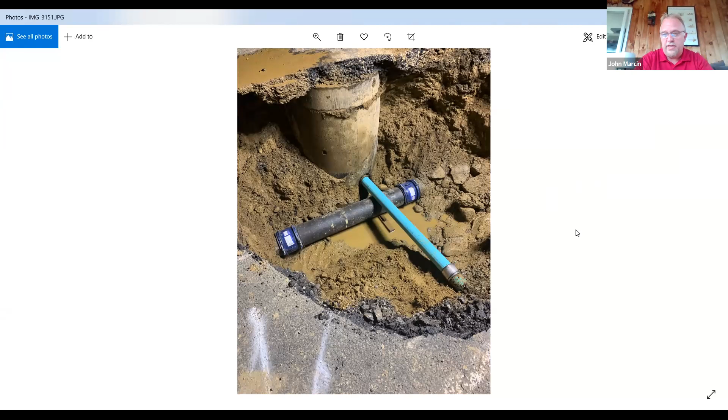I'm going to share a different picture now, and we can see. So the repair itself ended up being pretty tricky. Can you all see that picture? Yes, okay. So what you're looking at the top of the screen is a gravity manhole.

This was flow going from the left to the right, down the hill to the pump station. The black pipe on the very bottom is the 12-inch force main that's pumping up the hill, and this is after the repairs we made. The green pipe going into the manhole is the lateral coming from the high school. What we discovered when we eventually excavated everything was there was a patch placed on the original 12-inch force main right here, likely when this lateral was installed, which had ultimately failed and caused a leak in this part of the force main.

We were able to cut out about 8 feet of that 12-inch force main, install a new piece of pipe, install the 2 couplings, replace the lateral, and backfill everything. The team got that done. We started the dig at 4:30, and the road was paved and ready to go at 5 a.m. the next morning. So it was, like I said, a good team effort. AJ Penna contractors did an outstanding job.

It was a good effort in communication with DPW and the mayor's office and Ralph's team to make sure we got all the proper notifications out and to prevent any problems.

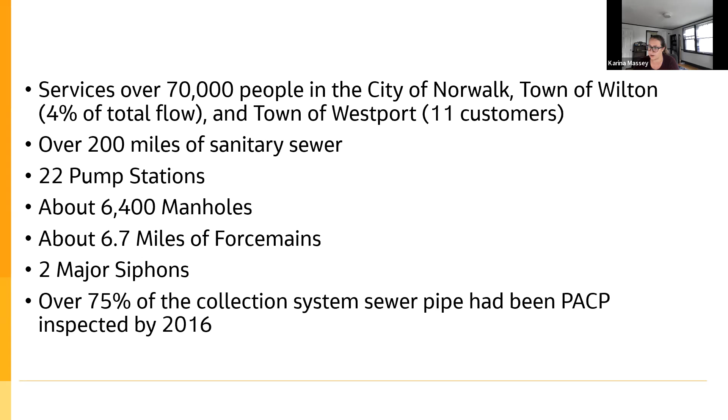When we began this project in 2016, over 75% of the collection system was PACP coded. That's CCTV inspections, but with the PACP coding, which makes reviewing videos and getting their likelihoods of failure easier. Now that number is a lot higher, but that's where we started in 2016.

So basically, when we start looking at projects in the collection system, these bubbles are kind of what my brain feels like trying to figure out what the problems are, because there's a lot of issues that go on in a collection system. Do you have fog issues, debris, deformed sewers? How are your force mains, broken sewers, historical problem areas? You have all this information coming at you, and it's really hard to decipher what is the focus area for each collection system, since each municipality is different.

From having a lot of meetings with Ralph and the team, and having, at the time, Jacobs was the operator of the plant, so we had some personnel who knew the system intimately, we were able to break down what we were going to focus on.

So we focused on the broken and deformed sewers using that PACP coding, likelihood of failures, and then we made consequence of failure matrices, historical areas, or as you guys call them, hot spots. And then we looked at the force mains and pipes downstream of the force mains to be included into the project.

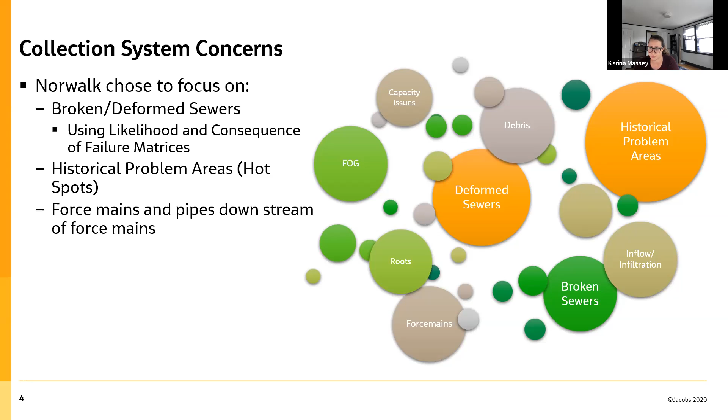So as you can see, we kind of got our bubbles down, and we ended up with a $2.75 million sanitary sewer rehab project. It targeted 36 pipes, which were part of our likelihood of failure and consequence of failure matrices.

And then out of the list of 79 hotspots at the time, we flagged 43 of them for sewer rehab. 13 were put on a watch list, 12 remained on the hotspot list, and then we noticed that 11 of the locations could be removed.

And then for force mains, as Ralph had said earlier tonight, they did a lot of CCTV of the pipes downstream of force mains to make sure they didn't have H2S deterioration or other issues. And then we also put the Marvin Beach force main replacement, which was designed under this project.

But as some of you might remember, there was a major failure before this project was able to get into construction. But having those documents already like 90% designed, they were able to quickly jump on the force main replacement under emergency conditions. So it helped speed the replacement of that force main.

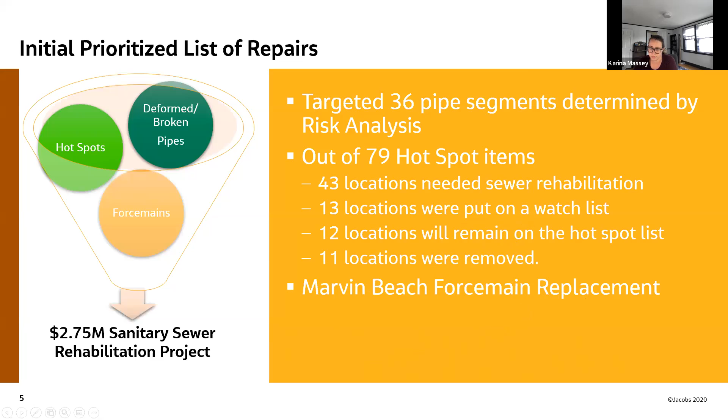So now we're in the construction phase. This is a short liner being impregnated.

So what got included in our construction project? We had cured in place pipe lining, pipe replacement, cementous and epoxy manhole lining, and then short cured in place pipe lining. So you can see on the left, we have the dig repairs, and on the right, you see them inserting a liner.

So something unique about this project is we decided to include additional pipes for repair mid-construction. We had a good project team together with the contractor, Jacobs, and WPCA. And we knew coming into this project that we weren't able to get all of the pipes that we thought were at risk of failing. We just did the ones that were the best, the biggest...

What do you call it? The biggest bang for your buck, kind of what you could get repaired - you get the ones that are higher consequences off the list. So those were in the original bid package, but then we added more pipes based on a likelihood of failure.

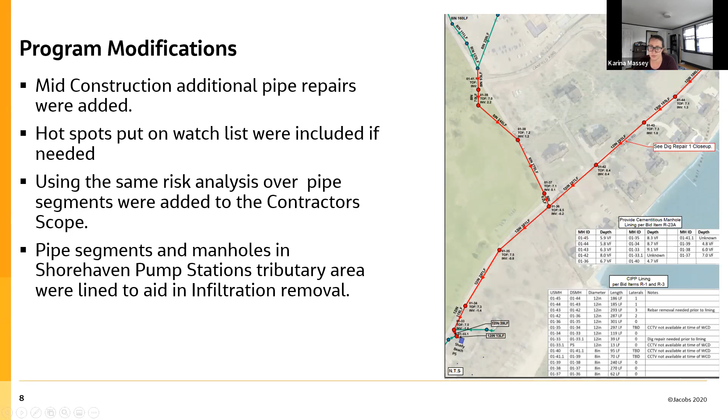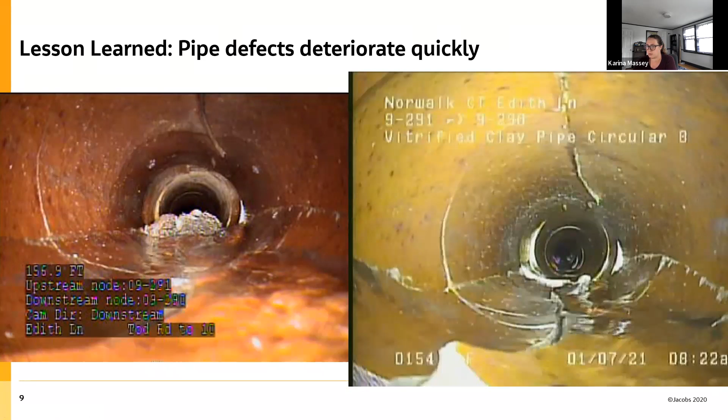So some lessons learned while we were doing this project. We started off with videos from 2016, and then we were adding pipes. As you can see, the pipes on the left are the old videos, and the ones on the right are the more current videos. The pipes deteriorate very fast, so a lot of the pipes we had originally said we could line, you couldn't line anymore. By adding more scope to the contractor's work, we were able to avoid pipes breaking and emergency repairs.

They do deteriorate within a couple of years, so being able to jump on as many as possible helped avoid major emergency digs.

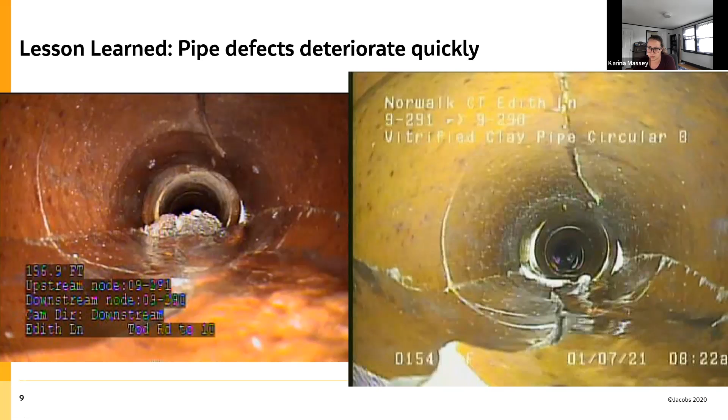Okay, so a summary. We started off with a $2.7 million project, and now it's at about 5.3 million. With that extra additional cost, we were able to almost double our small diameter CIP lining. We added 2,000 linear feet of large diameter lining, and we included some tricky areas like the Smith Street area, which with a large diameter CIP like that, you need a significant bypass.

And we tripled the amount of sewer replacements, and we added some short liners. So we were able to get a lot more done with the contractor.

So some project achievements: we were able to target the concerns of the WPCA in a cost-effective manner. We added twice the original scope, and we were able to repair over 20,000 additional feet of pipe. So those are all things that could have been pipe failures around this time.

And pipes that we were able to CIP line instead of doing emergency dig repairs, it can be over 10 times a cost savings for the client, for WPCA. So being able to line pipes before they need to be dug saves a lot of money.

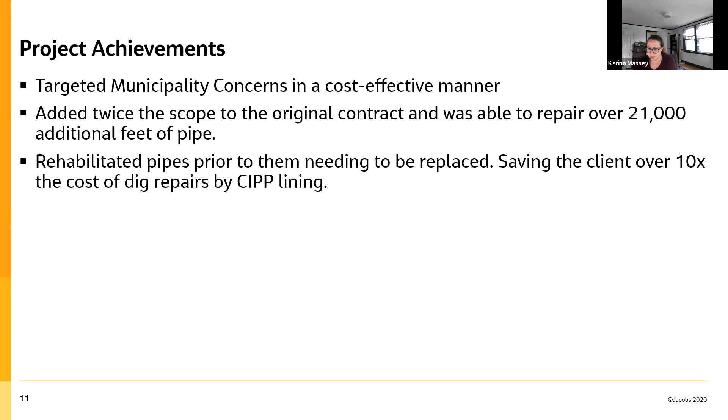And then just some pictures for everyone. I think this is going to be a video of some infiltration that we took care of actually this month. As you can see coming up, we have what's called a gusher. This is one of the more severe ones that I've actually seen.

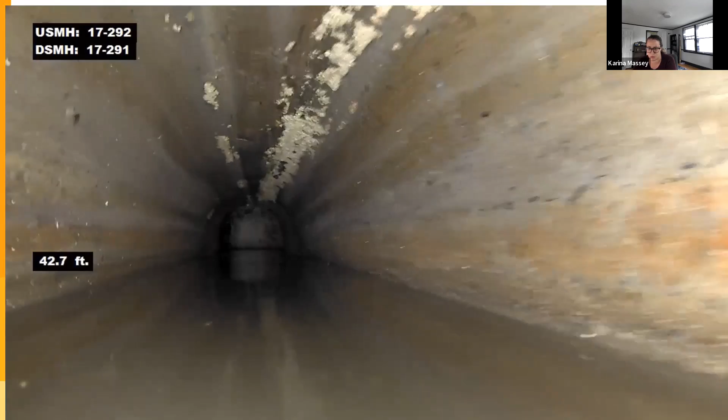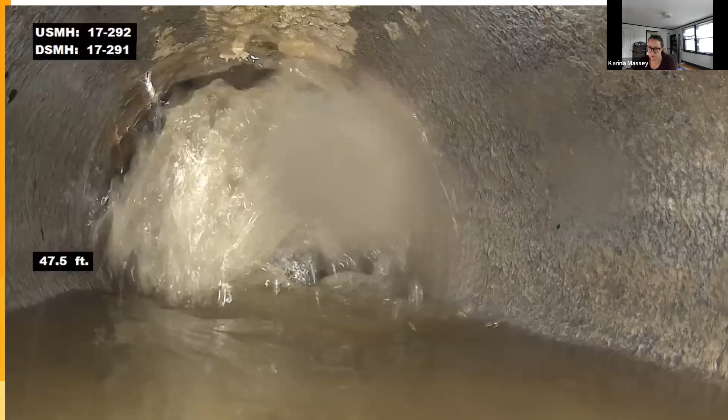So what we did here was some cementitious grouting. I'll let you see that for a second. We cemented and grouted this, and now, they have to come back and clean this up a little bit, but now we have no infiltration here.

So that's a big savings for a lot less flow coming to the plant. We're not overflowing our pump stations. So that was a big win there.

Hey Karina, this is Ralph. I'd just like to add for the board members, we estimated that gusher to be 5 to 6 gallons per minute, which, do the math, 1,440 minutes per day, 365 days per year, we're looking at reducing flow to the plant by over 2 million gallons a year, just for reference.

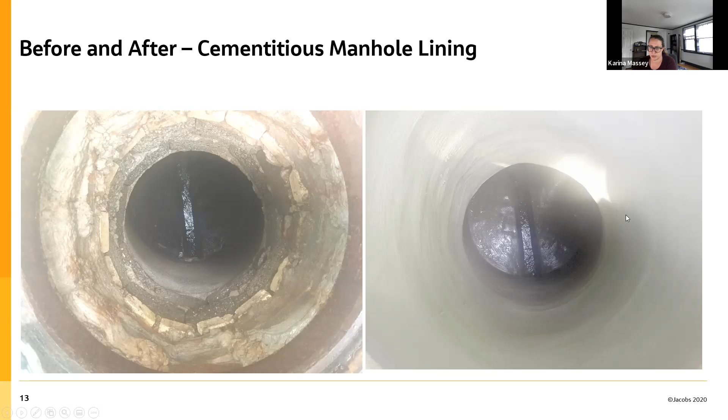Other things we did on this project include some cementitious lining. As you can see, the manhole on the left has loose bricks, a lot of dirt and deterioration, areas where infiltration can get in. On the right, that's the manhole after it's been lined, so it looks like a brand new manhole. It's a great win when we're able to reduce I&I and reinforce the manhole structures like this.

Then we have our CIPP lining, I have a couple of these. So take a pipe that's about to fail like this one, and then we have basically a brand new pipe. This is where you get the great cost savings, because if that was an emergency dig repair, that would have been tens of thousands of dollars, but now we have a brand new pipe for a couple thousand dollars.

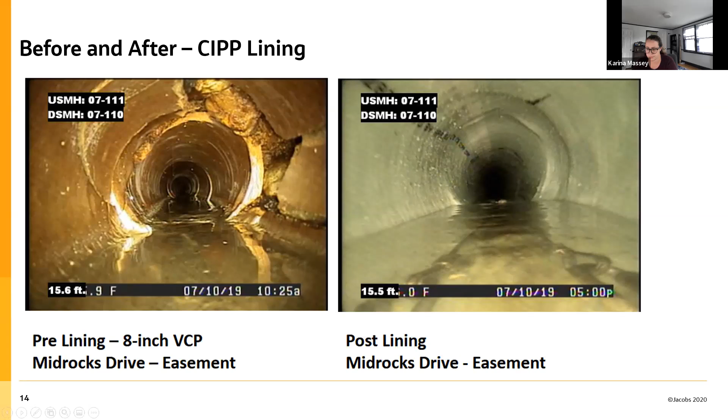And here's when we have significant root issues.

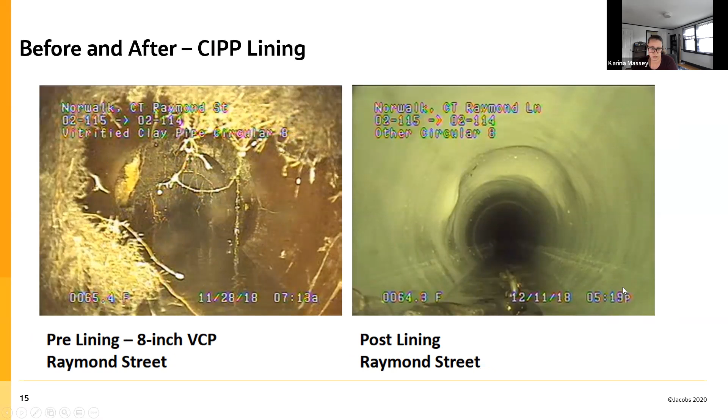So this is some of the hot spots we removed, because you have to come back and keep cutting the roots over and over again. But when you line them, you don't have that problem anymore. So it removed repeat work, which is a good win too, along with infiltration.

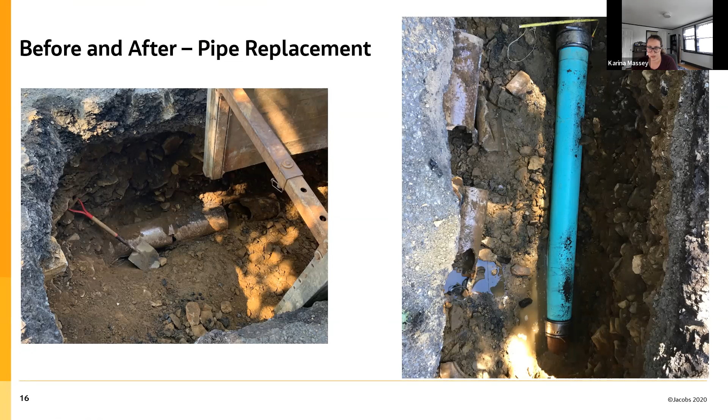And then we have our pipe replacements. As you can see here, you have a pretty broken clay pipe, and then you replace it with segments of PVC. We like to avoid dig repairs with the lining, but they're inevitable with some pipe deterioration, so we had that under our project as well.

All right, any questions or slides you'd like to see again?

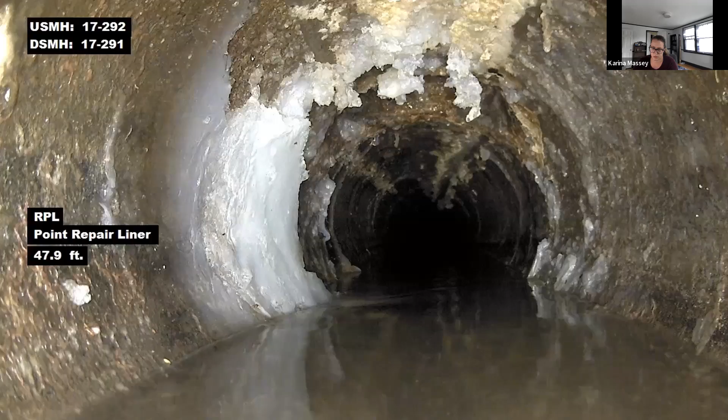I have a question. Is the liner rigid once it sets, once it's put into the pipe? Yep. So the liner starts off like a felt sack, kind of like a sock. Then they impregnate it with resin, take the impregnated liner, shoot it through the pipe, and blow it up so it takes the shape of the existing pipe. Then the resin cooks, and once it's done cooking, it gets rigid and very strong, just like putting in a PVC pipe. So you basically have a brand new pipe when you do the CIPP lining.

So the host pipe could fail or get cut out and disintegrate, and the liner, since it's structural, is there for hopefully 50+ years. And that water infiltration, is that groundwater or seawater, or what is that? I'll answer this question.

So that gusher that we saw was about 5 or 6 gallons per minute, that's on South Beach down in Rowayton. That's a tidal area, the pipe's deep, it's always below the tide. So that is groundwater and tide trying to come into our pipe. Got it. Thank you.

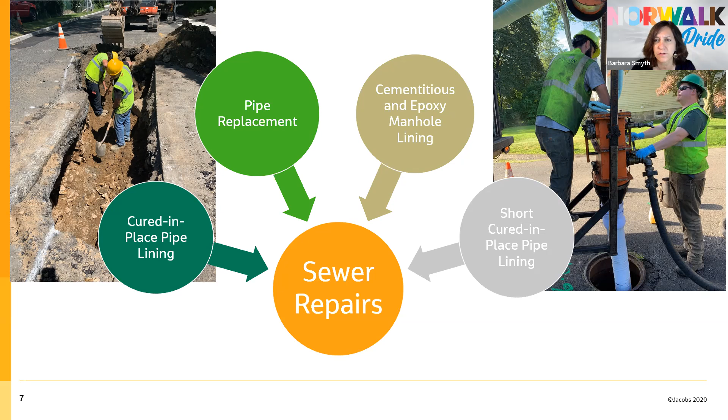I have a question, Karina, it's Barbara. Could you go to the slide with the project cost, the total cost? So the original metrics were 2,700,000, and your final were well over 5 million. Obviously this project is well worth the investment, it will save time and money over an extended period, but I am curious where the funding came from to make up that difference.

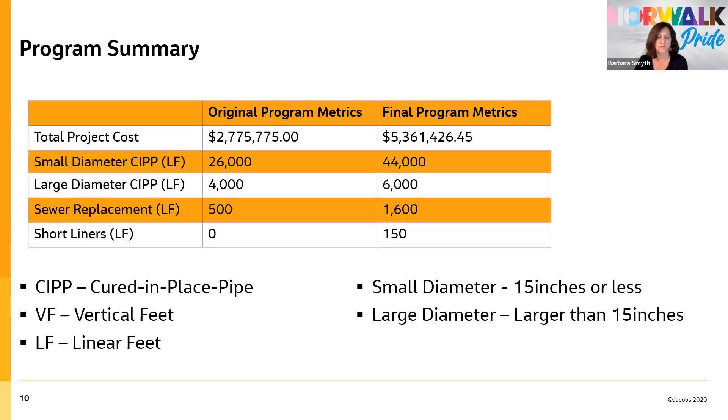It's all WPCA capital accounts, Barbara. Every year we're asking for collection system funding, so it was capital monies dedicated for collections that was not encumbered or was available. We went back to the WPCA board when we found, for example, Smith Street. I can't remember the exact price to do Smith Street, it was like $600,000 for lining and for the bypass.

But that came very quickly because the city was moving into an agreement with the Head of the Harbor project, and basically the agreement was that we would not excavate without receiving Connecticut DEEP approval before any excavation. Because of the condition of the pipe, once that agreement was signed by both parties and submitted to the state, we wanted to get the lining done because of the location and severity of the pipe. So that's why that work, we jumped on it very quickly. The WPCA board approved use of the funds, and that work was included in the project.

What's been great is Green Mountain Pipeline Services, our contractor - all the pricing we received was from 2018, which they've honored throughout to this year even. So our rates have been excellent. That's why part of the project was for them to televise certain areas, and then based on the video, come back to us to see if we wanted to include additional lining.

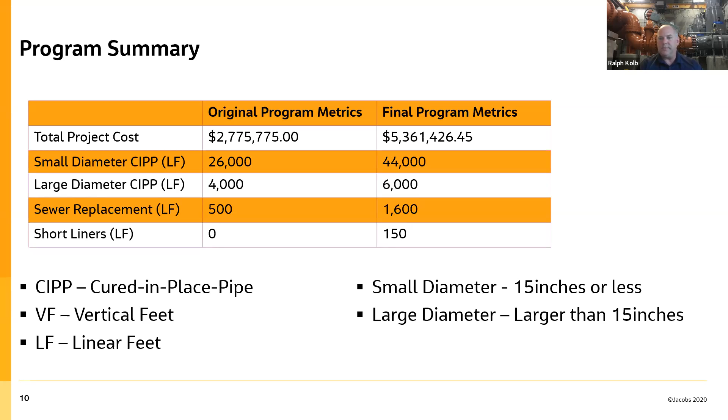So that was some of the stuff we found with the videos, that's why we added it, because if we didn't act or line today, we're probably going to have to dig in a year or two at 10 times the cost. Okay, thank you very much for that explanation. You're very welcome.

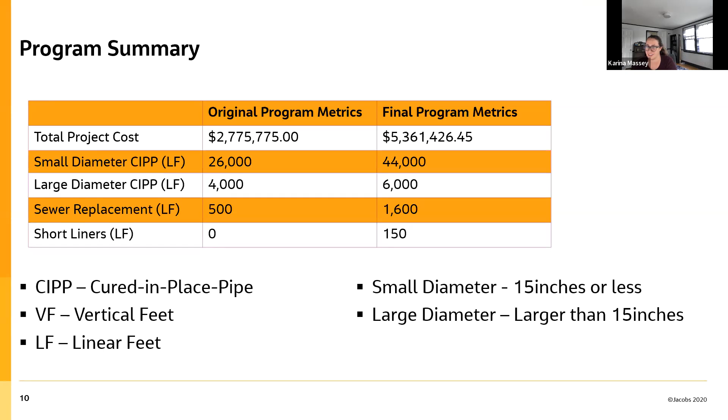Item 6B2, collection system master planning. Brown and Caldwell is a consultant that's been working on the master plan for their collection system. A draft plan is due to submit to the state of Connecticut by September 30th, an update to our collection system master plan. So in the next couple of weeks or so, the WPCA should be receiving the initial rough draft of that plan. Once we receive it, the team will review it and provide comments, and go back and forth with Brown and Caldwell, along with Vero Law, the legal team reviewing this since it's a submission to the state. So that's in progress.

Item 3, collection system Wall Street to Knight Street relocation improvements project. I'm working with Karina Massey, the project engineer for this project as well. For those that haven't been on the board, we have a 30-inch oval-shaped sanitary sewer pipe that flows underneath 2 Knight Street. We're relocating it from underneath the building, and to do that we have to build a chamber to allow us to go through a 77 by 112-inch storm drain. We're able to cut through this by increasing the storm sewer capacity at the location where we're crossing, so the design is 940 CFS. There is no drop off with the stormwater system because of what we're doing.